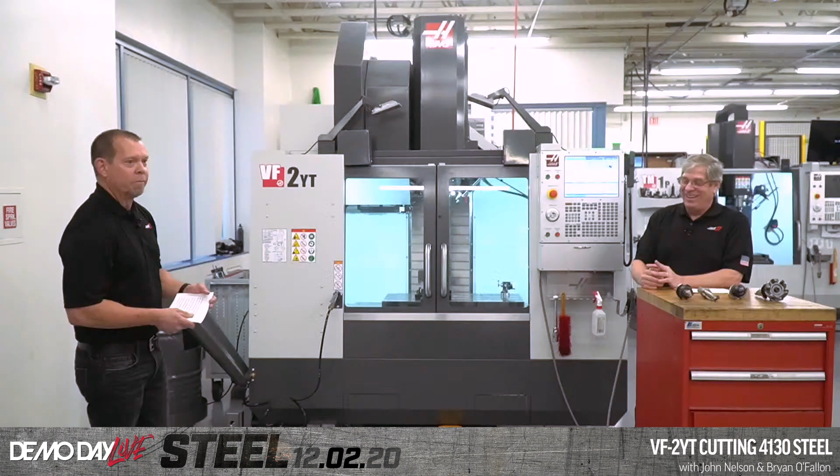So if you haven't watched before, this is John Nelson, our Senior Applications Engineer. Any of you have watched any demo days? I think you've been in every single one of them. Yeah. How a UMC is built, I wasn't in. Yeah, you missed one.

Okay, so you've been with Haas for about 20 years. Yeah, next month, 20 years. Okay, and 12 of those were in an applications role? Yeah, for 12 years I was either an applications engineer or managing that applications department. And how many times have you heard people say, Haas can't cut steel? And yes, that's how you all sound in my head. Yeah, we have definitely heard that before.

As the applications department is the group that's responsible for helping Haas customers use their machines. And there are a lot of people who have contacted us about having trouble cutting steel on their Haas machine. But it's not because the machine wouldn't cut steel, it's because they were not running at the correct parameters for that machine, right? There's a mini mill that's a 7.5 horsepower spindle versus this VF2YT that's got a 30 horsepower spindle. So there's a big difference, right?

This has 3 times the torque that machine has. You can't take the same cut in steel on this machine as you can on a mini mill. It's that simple. And then the last demo of the day, we're actually on a 60 horsepower machine. Yeah. So even a step up from here.

And we were talking a couple weeks ago, there was a customer that had, I don't know, a 3 or 4 inch shell mill on a tool room mill trying to take a massive cut, and he couldn't figure out why the machine wouldn't do it. Yeah. And that's exactly what you talked about. You got to have the right machine for the job.

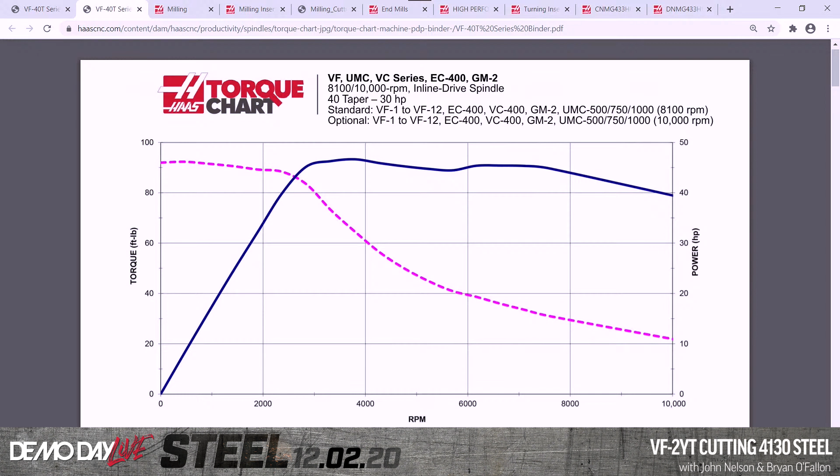So we can take that power that we're not using to make the spindle rotate quickly and turn that into torque. So we have maximum torque at low RPM, and that's the dotted line up here. So you can see that our maximum torque on this particular machine is right about 90 foot-pounds of torque. So the foot-pounds are listed on the left-hand side of the chart.

The horsepower values are listed down the right side, and along the bottom is RPM. So you find your RPM and then see what torque and horsepower you have at that speed. Don't forget to verify the machine models and the spindle type at the top of this torque chart.

On the torque chart for this particular machine, the first chart you're going to see is in imperial units, right, using horsepower and torque in foot-pounds. But if you scroll down one, you'll get the metric version, where we have the power in kilowatts and the torque measured in Newton meters. Right. So that's the difference between those.

And if you go down again, you'll see the torque chart for this machine with a gearbox. So we have two sets of torque and horsepower lines on this. One of them is the low gear values. The other set is the high gear values. And you can see where the shift point is there.

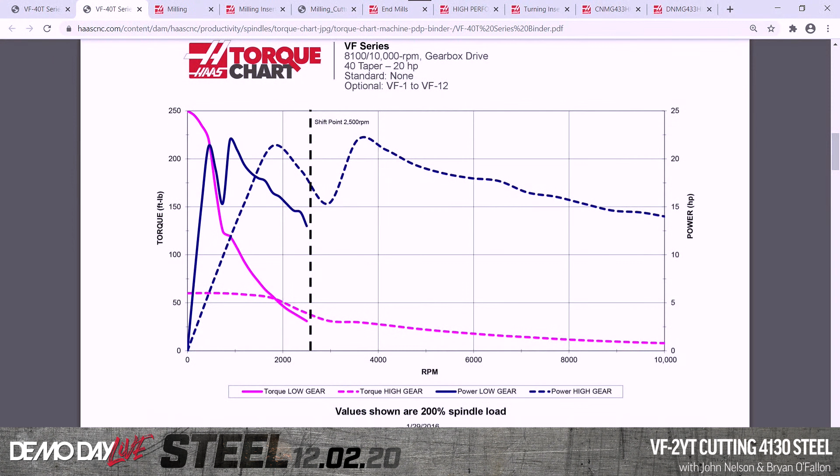So that's the torque chart. And if you're really doing heavy cutting, you may want to consider a gearbox machine, because you can see you've more than doubled your torque at low RPM. Yeah. So this machine without the gearbox is 90 foot-pounds of torque peak. And then this machine is 250 foot-pounds of torque, so there's quite a bit more.

If you're cutting hardened materials, if you're cutting tough materials, stainless steels, titanium, you definitely want to get a gearbox machine. It doesn't mean that you can't cut those materials if you don't have a gearbox. It's just that you can't cut them as efficiently as if you had a gearbox.

And after our demonstration, we're going to measure the spindle load values of each of the cutters in our demonstration, and then we'll go back to the torque chart and show you how those values relate to the torque and horsepower curves in the torque chart.

Okay, the other thing we're going to do is go through each tool. Now, each of these tools is from HaasTooling.com. Yes. So we're going to talk about feeds and speeds. Andrew, do you mind pulling up HaasTooling.com?

Yeah, okay, so from the website, if I go over to the right side of the screen here and hover over Haas Tooling, this gives you access to all the various menus for the different kinds of tooling that we sell. I've already clicked on the milling section here, and I can see I've got milling bodies, inserts, end mills, all that sort of stuff. Now I've got another tab open. Here's milling inserts, and this is going to get us close to where you're starting off with, right, John?

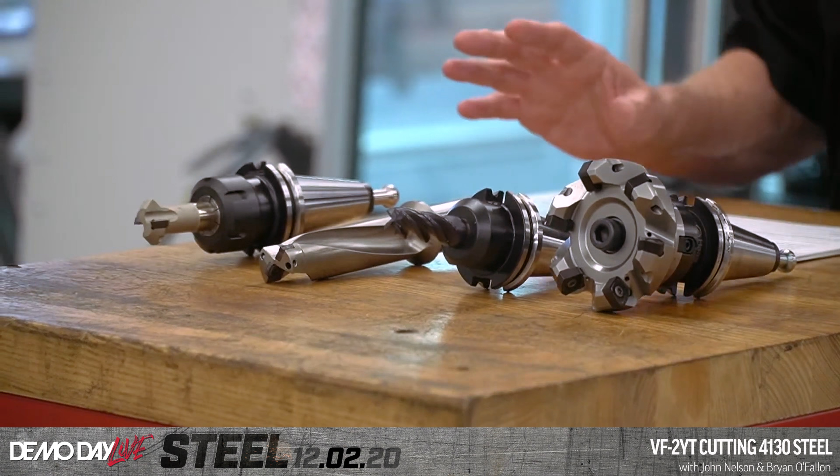Yes. So tool number one in my demonstration program is the 3-inch face mill. It's got the 45-degree inserts here. It's a 6-flute face mill, and we've got the speed and feed chart up there, and I've put a red box around the different parameters that I'm using in this demonstration. You can see I'm cutting an alloy steel over here on the left. I'm using the HMP 35 inserts, which are the preferred grade for steel.

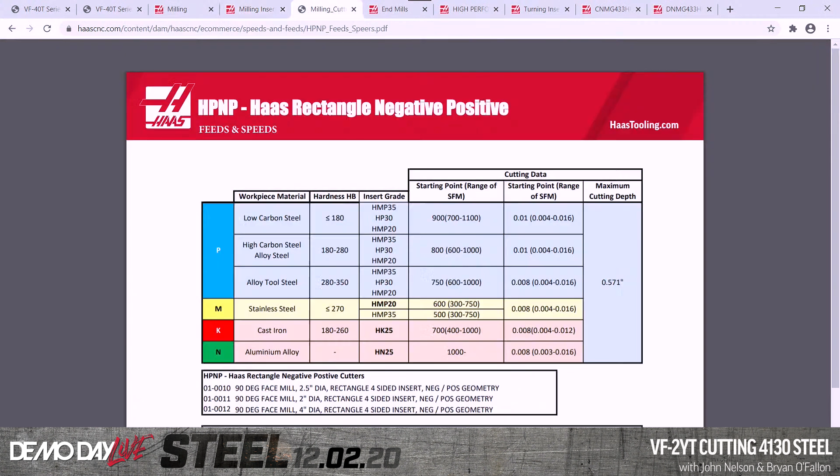And I've programmed it at 850 surface feet, which is right in the middle for a spindle speed. And the feed per tooth is 10 thousandths, actually just a hair under 10 thousandths, which again is right in the middle of the recommendation.

So the point is to show you that if you get these tools from HaasTooling.com, plug in the numbers, if you got all the parameters right, you're going to be right in the ballpark. You'll be able to make those cuts, assuming you've got the amount of torque that's required for that cut.

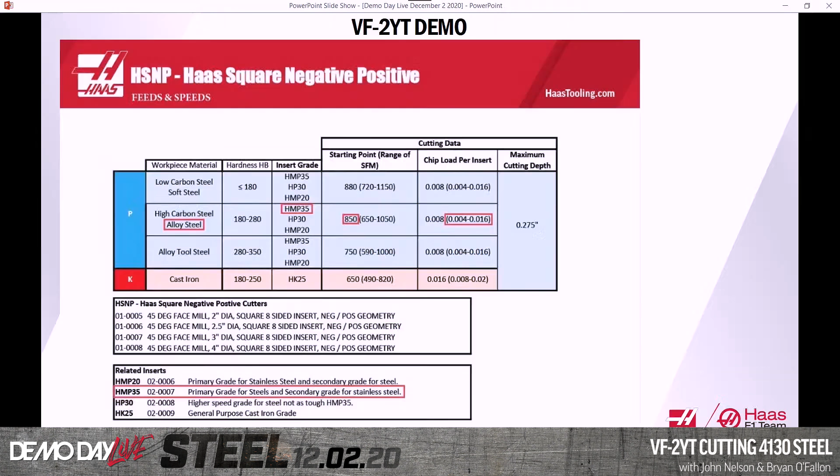You'll be able to take that cut and then optimize for your particular application if you need to speed up or slow down. So Andrew, you want to show them how you get to those? Yeah, so let's go. I'm back now on the main milling inserts page, and I don't have your exact one here pulled up, but let me just click on any one of these because this will just show us. So I click on the insert.

So here's the insert page, and down here you can see technical specs and stuff like that. But what I want is this speed and feed. It's kind of hidden away here. But if I click on this, this will bring us to the same chart that John was just showing, except that John's version that I have here is highlighted, of course. I'm just going to click back over to that. He's got the actual values that he's using highlighted, but you can see it's just a couple clicks away to get the information that you need. Okay. So back to you, John.

Yep. So the second tool in this program is the 3/4 inch 4-flute end mill. This is the standard length end mill, 4 flutes, and Andrew's got it pulled up over there. The surface footage that I programmed is 575 surface feet and 4.4 thou feed per tooth. On the depth of cut, we're going nice and deep at 1.5 times diameter, and I'll talk a little bit more about that when the actual tool is running.

The third tool in my program is the drill. This is a 1.25 inch inserted drill. We're using TSC on this one. Again, we programmed that right at 540 surface feet per minute and feeding at 6.1 thou feed per revolution on that tool.

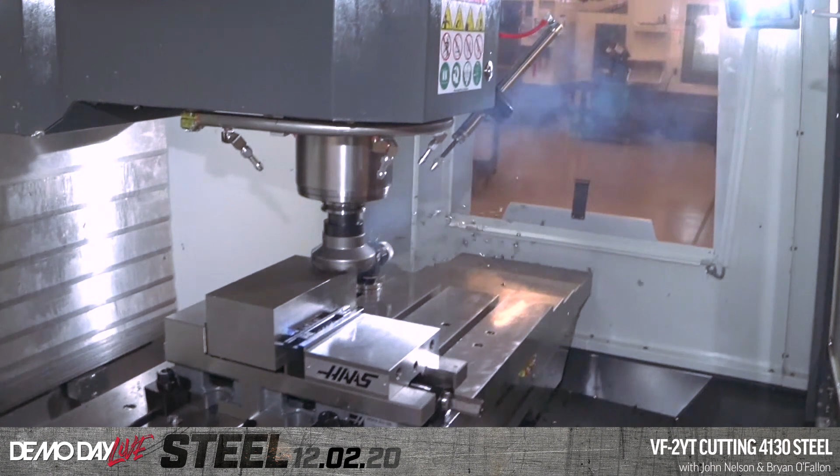I'll mention one thing real quick. In the demo program, I used a little macro statement to zero out the spindle load meters for each tool before they run, and then it'll record the maximum spindle load that tool achieved during the cut. I've got all of that information being printed to a file, and we can take a quick look at that at the end of the demo, and then we'll relate that spindle load information to the torque chart next. Perfect. All right? Okay.

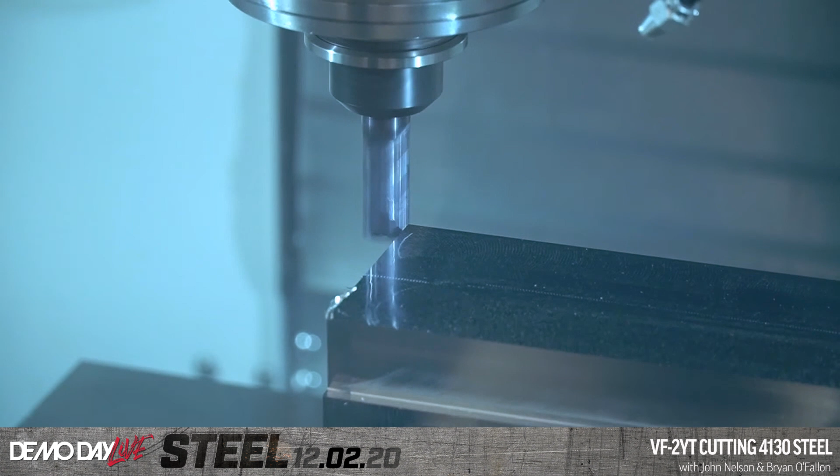So this cutter's coming in. It's taking 150 thousandths depth of cut and a 2-inch width of cut. My spindle load meter is hovering around 130. You can see the chips coming off there are nice straw colored, and as they hit in the pan, they turn a little bit blue. That means we're cutting just perfectly.

Here's the end mill. So this is 1.5 times diameter deep. This is 1.125 inch deep. And I'm taking 33% of the diameter width of cut, which is 250 thousandths on that 3/4 inch end mill. So 1.125 deep, and 250 width of cut. We'll take a couple of cuts.

And again, you can see that the chips are coming off straw colored or a little bit blue, and when they hit the pan they turn real blue. That means all the heat in the cut is coming out in the chip. This thing's cutting really well.

And what kind of spindle loads do we have? Spindle load is 75%. Okay, so you've got some room if you want to. I've definitely got room to optimize a bit. I could increase my width of cut and take a bigger spindle load because I've got the headroom there. Do a little cleanup pass here just to make it look nice.

I was wondering if you could get a shot of the chips over there on the way cover. I'll hold this. You can see the color of the chips, how they're nice and blue. The thinner chips, which didn't carry as much heat out, are straw colored, and then the bigger, thicker chips have turned blue because all the heat in the cut has come out in that chip and not in the workpiece or the material. Okay, I'm going to focus back on our part and I'll continue.

So that's a 1.25 inch inserted drill going through 3 inches of material. My spindle load is 95%. It's fluctuating a tiny bit right around there, but that's perfect. Right at 100%, 110%, 120%. We can do that all day long with that tool. And you definitely want through spindle coolant with this tool. You got to get those chips out of there. Yeah, definitely. Unless you're doing a very shallow hole, you've got to have through spindle coolant with these insert drills.

We'll toss 3 holes in there. So one of the things we talked about was spindle load, and you say you feel comfortable running that all day long. It's always a balance, right, between tool life and how fast you're removing material? Yeah, absolutely. So with regard to spindle load, the vector drive in Haas machines will allow you to run below 150% continuously, right? All day long in that cut.

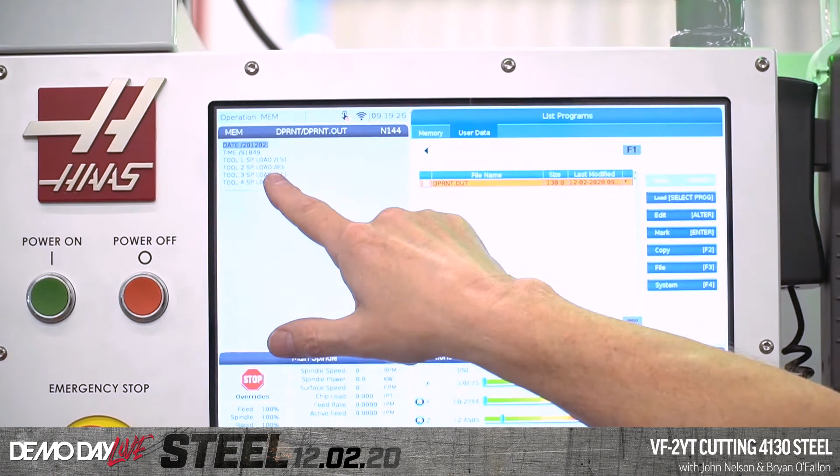That's right. Yeah, in my previous role here, I used to go to a lot of customer shops, and guys would be running their machines at 30, 40% spindle load, thinking that was going to make them last longer. Yeah. And it probably did, but you're leaving money on the table. Yeah, for sure. The extra cycle time that it takes to machine at those lower spindle loads is costing you money. Exactly. For sure.

So I wanted to take a quick look. I'll show you the DPRNT file here that I created. So at the end of this program, I wrote the maximum spindle load recorded by each tool. So tool 1 had a maximum load of 151%. Tool 2, which was the 3/4 inch end mill, did 83% at a maximum. The drill was 111%, and our chamfer tool was only 5% spindle load. So you get an idea of where those loads came out, right? Well, 150 for the face mill, 83, 85 for the end mill, and then 111 for the drill.

Now let's pull up the torque charts and see how that information jives. Hey, look, I got it right here for you. All right, I'm going to scoot over here just a little bit. So when we were preparing here, I recorded 155% spindle load on that face mill the first time through. You can see that the maximum torque is up here at 90, and that's 200% spindle load. You can see we talk about that here. The values shown for horsepower and for torque are at 200% of the load of the spindle motor.

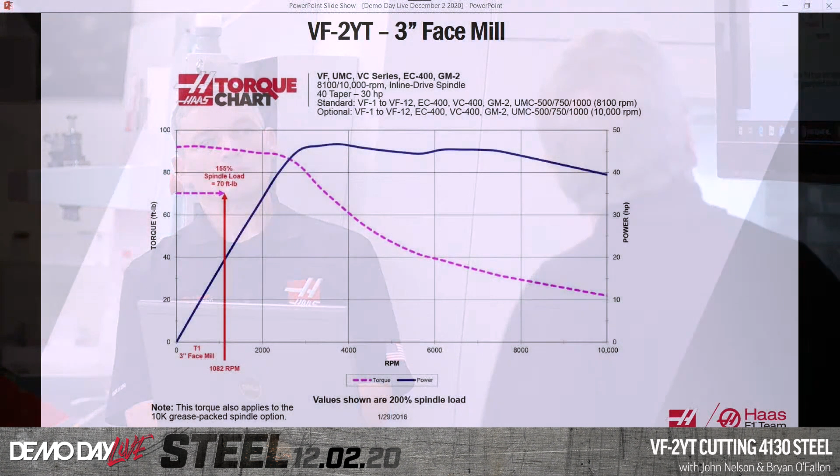So our cut was 155% of that spindle load. When I take 155 and divide it by 200, I get 0.775, 77.5%. That's my conversion factor. So at the RPM I was running, 1,082, I have right at 90 foot-pounds of torque. So 90 times 0.775 gives me 70 foot-pounds of torque.

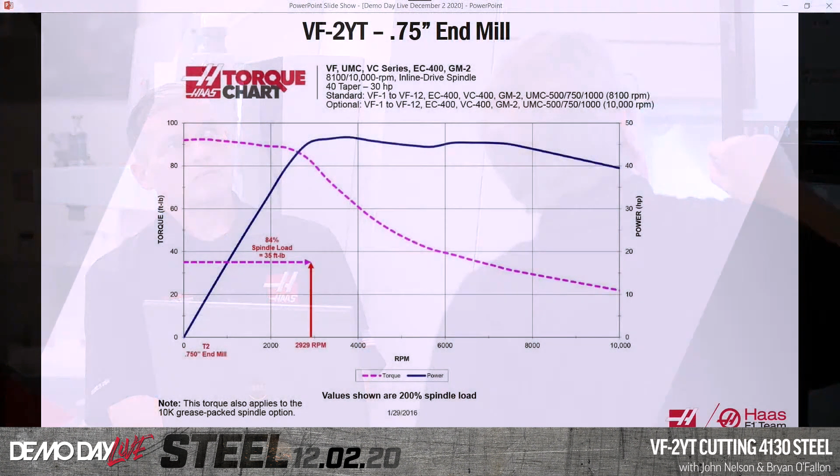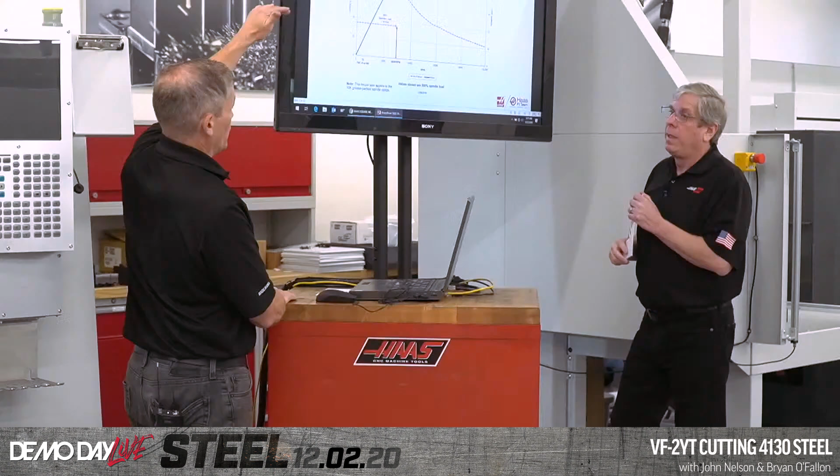So that's the torque value that I pulled, 70 foot-pounds at 155% spindle load. Now let's pull up the next chart. This is the 3/4 inch end mill, and that was running at 2,929 RPM. So my torque value is a lot lower here because the chart has come down. So at this RPM, I have less available torque.

I pulled an 84% spindle load and did the math on that, and that showed me that that end mill was requiring 35 foot-pounds of torque, and this is where that 35 foot-pounds falls in. Remember, this is my maximum, not that, when I'm making this calculation. And then the last tool... So actually, in this case, you had quite a bit. You have a huge headroom in terms of running that tool harder, but you probably don't want to run it that much harder. Right.

In that case, I was taking 250 thousandths width of cut and 1.5 times diameter deep. So I would ease that width of cut in if I needed to remove more stock per cut. That's how I would utilize the available spindle load that I have on that tool, and I'm probably not going to harm that tool or cut its life down at all by increasing that width of cut.

Right. When we were preparing for this, you were talking about how, if you're unsure about what spindle load you want to use, you'll start light, and then see where that puts you and then do the calculation. Yeah, absolutely. If I was unsure about the cut I wanted to take, I would get the speed and feed information for the cutting tool and use right in the middle of the speed and right in the middle of the feed rate, and then take a light depth of cut. Set up your cut with the width you want, but take a lighter depth.

So that's how taking a light cut, monitoring the spindle load and seeing how much available torque or headroom you've got on spindle power, and then go from there as far as adjusting and optimizing your cutting parameters. But definitely go with the recommended speed and feed and adjust your cut parameters as far as depth or width of cut. Right, it's just a practical, empirical way to quickly get to a good value without doing some involved power calculation. You just start off at the recommended values.

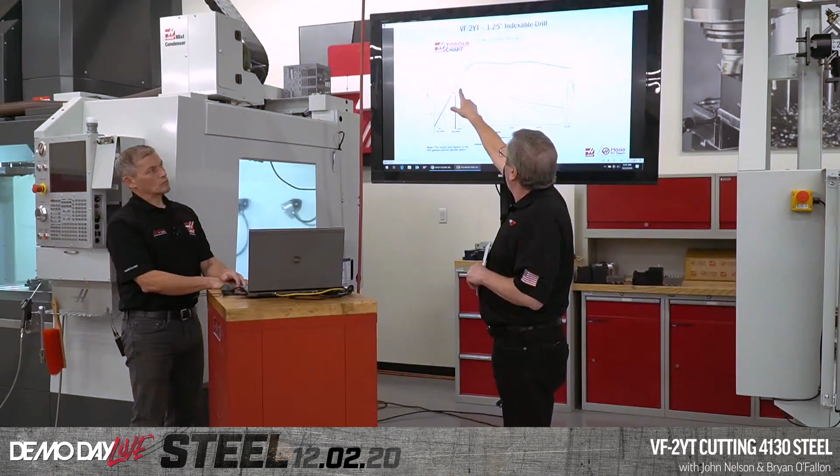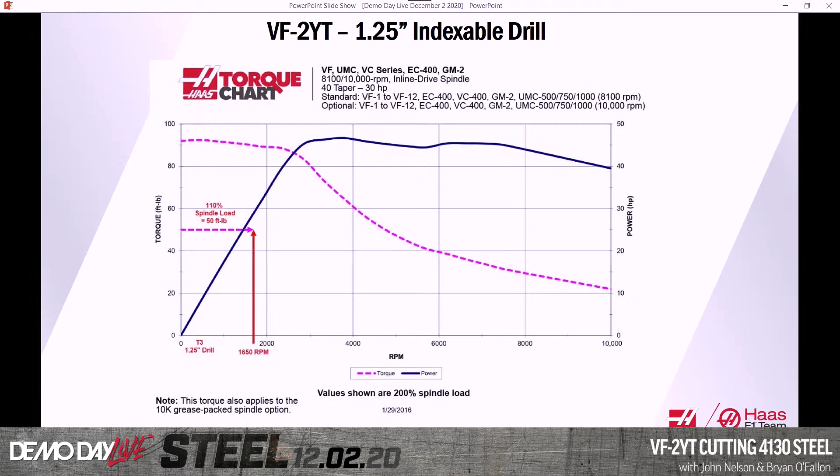There's also milling and turning calculators on the control where you can punch in your numbers and it'll give you a rough value for required power based on what material you choose on that calculator. Right. Okay, so third tool. The third tool here was the drill. That was running at 1,650 RPM, where we're back up in our maximum torque range, but we pulled 110% spindle load.

110% divided by 200 gives me my percentage, which I multiplied by the 90 foot-pounds, and the percentage was 0.55. So 55% of 90 foot-pounds of torque is 50 foot-pounds of torque. So that's what that cut pulled, and I was definitely right in the sweet spot for that tool at 110% spindle load.

Cool. So that's how you translate the spindle load numbers to the torque chart and figure it out. Right, you know what your spindle load is from the machine, you have this information on the website or any other place you're getting your tooling, and it's easy to get started. Yeah.